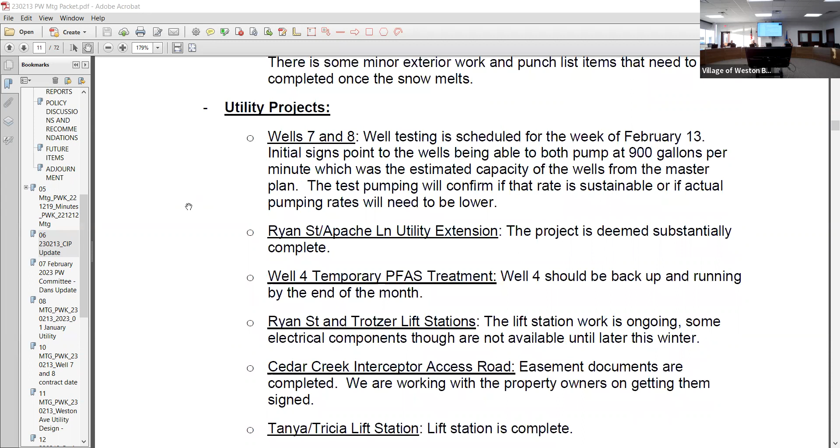And I guess everything else—well, Josh may touch on this—but the well testing is scheduled for this week. The initial signs point to both wells being able to pump at least 900 gallons per minute, which is what we were anticipating, so it's good news.

Initially they were fairly low, so they had to do a couple extra well treatments to get the pumping levels up. Did they blast it? Yeah, they did some shocks and some extra cleanings. Hydrofracture? Yeah, they did a couple different things. They came back with a different process—I can't remember what they call it, some acronym—but it gave them results. I think they were having trouble getting up over 700 for quite a while, so whatever they did seemed to work.

Is it hydrofracture or is it blasting? That's something we can do, sure. I guess that's really it, kind of in the winter lull a little bit here. The Crestwood Acres special assessment letters did go out last month.

That's for the stretch of Weston Avenue between Alderson and Birch. You had a comment in there—Mr. Peterson wants to go back and review it? There was a question by Rothschild about whether they wanted to have a roundabout still at the intersection of Alderson and Weston Avenue. That was what was in the original design proposal, and that's currently how it is being designed.

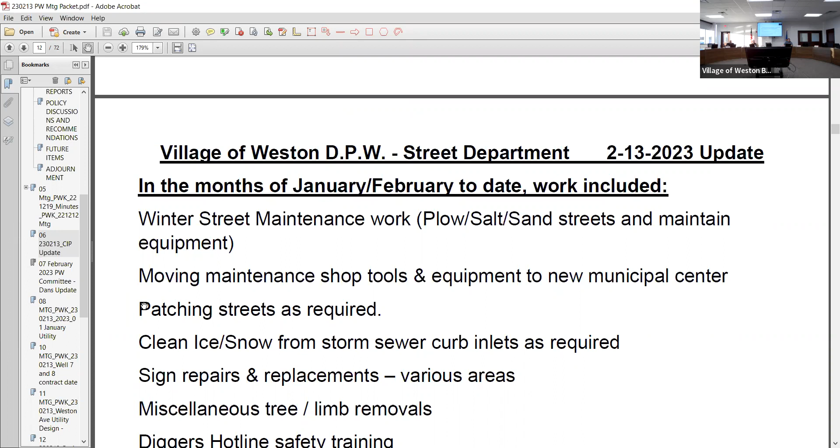Other than that, it's been snow removal. We're pretty much done with that. We got a few streets to finish and there's some cul-de-sacs that we want to clean out yet too, because even though it's only February 13th, we could get blasted with some snow yet between now and April.

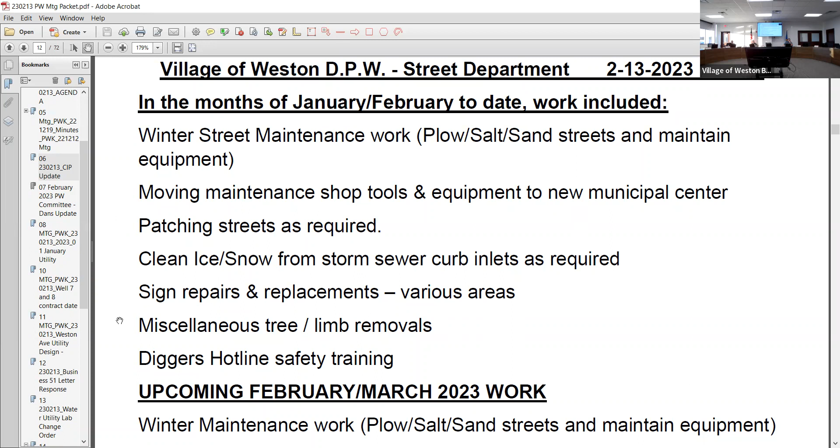So we're going to do what we can on that. Miscellaneous tree removal and stuff, patching. The big thing is moving from the old shop to the new shop. It's a process, there was a lot of items to move. There's a lot of stuff that needs to be put away yet and organized, and it's just gonna take some time, because you can't just stop what we're doing on the street and devote everything to that. So we're trying to work around it all, make it all happen, so it's gonna take a little time, but just keep on with what we're doing.

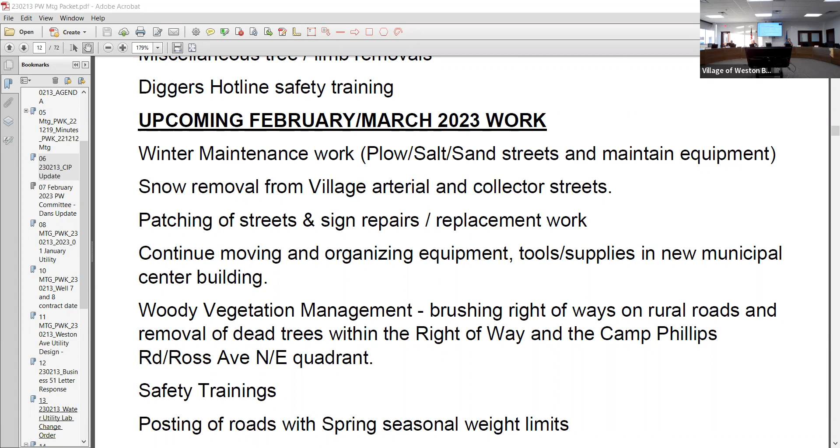We got to use the new building. I took some pictures in the meeting room next door. Diggers Hotline doesn't do the big meetings anymore at Weston Lane, so we had a meeting here. I talked to Diggers Hotline, they come in and we invited Rothschild, Schofield, Kronenwetter, brought people, and it was about an hour-long presentation, which was good. Hopefully as we come into spring, there's some other safety trainings we want to try and do.

I was talking to Dave about some chainsaw safety we want to do again too, probably getting into March sometime, middle to end of March, get that done. So just kind of keep on with what we're doing now, see what Mother Nature throws at us.

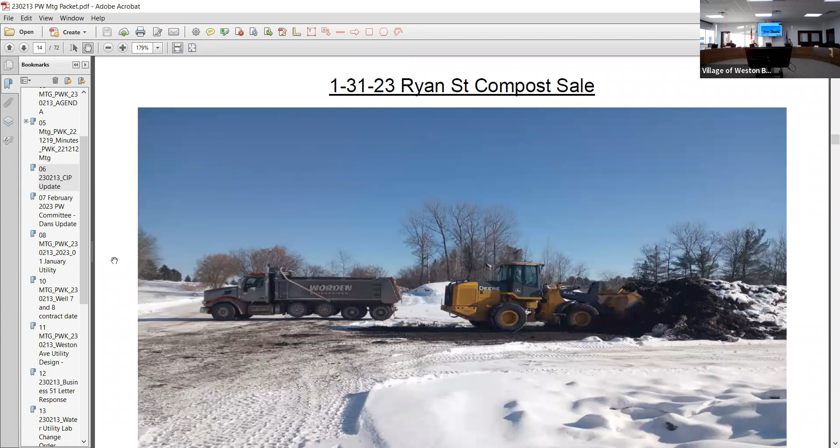There's one thing too, there's a picture there with a compost sale. Randy Worden gave us a price on compost, so there's 3 big rows out there that we're going to sell to him. That's probably over 1,000 yards of compost, which is kind of a good thing, and will free up some space out on Ryan Street for us.

Myself, I've been working on getting all the road maintenance contracts together. We want to have a bid opening on April 5th of this year for crack sealing, chip sealing, all that stuff. Also we're going to look at the contract for Stone Ridge Drive. That's going to be a rehabilitation project going from Weston Avenue north past Sherrill Tire, Westview Boulevard, and it's going to wrap around, go to the west, and end at Ministry.

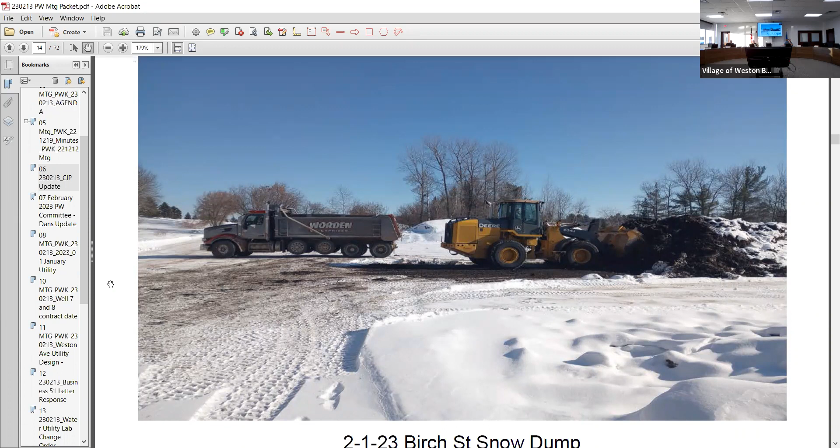There's a lot of bad curb in there, a lot of bad joints on the curb. There's 11-foot long pieces of curb and the joint is rotted that wide. So you hate to rip it all out. It's expensive to do the joint repair, but it's cheaper than ripping it all out and having to do all the restoration. So that's got to get put together yet too.

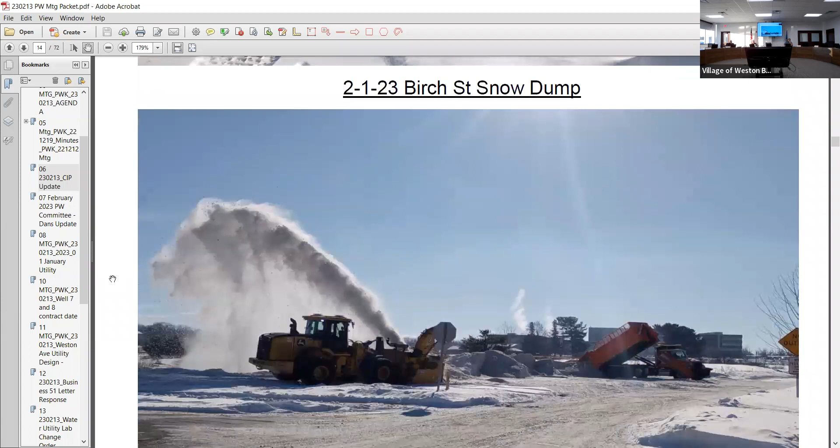And then the asphalt will all be milled off and we'll adjust the water valves and manholes, new asphalt, and the restoration work. So, how much item you have for auction? How many pieces? There was some place you said you have some items you have to auction.

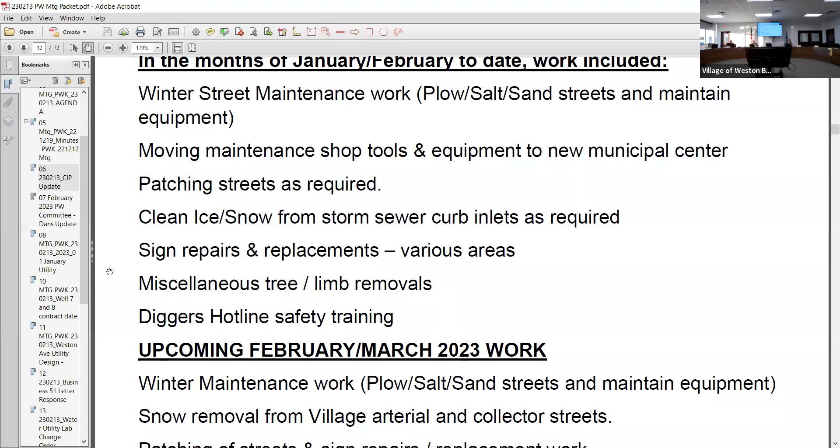You're not using it anymore? We are. There's stuff that's probably going to end up on the Wisconsin surplus online auction yet. Brian Schmidt, our mechanic, is the one that basically has the list of items. There's some stuff, there's an old tire changer there, and there's some other things that'll probably go up on Wisconsin surplus.

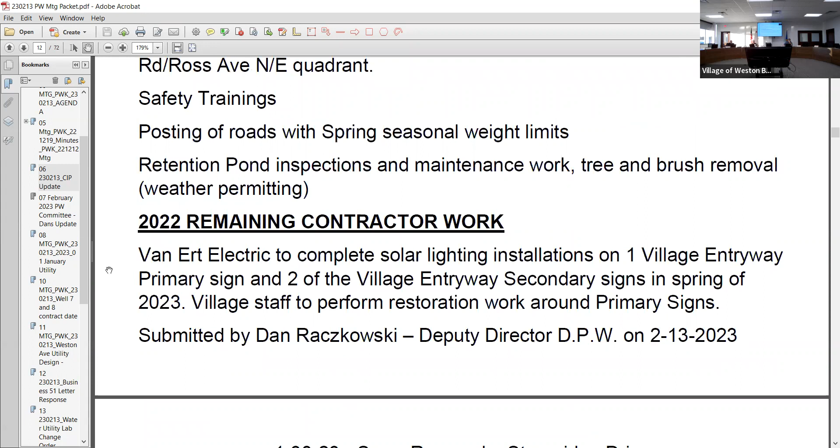I don't know if you got any more insight on it, Michael, than I do, but. No, we figured once we moved over everything that we deem as essential, whatever's left, we'll inventory and, as this committee generally approves it as being declared surplus before we put it on the auction site, so.

And then you'll see there it says remaining contractor work. I actually ran into Doug Milky up at Menards a week ago on Saturday and talked with him. He's researching, we want to put solar lights on the primary signs. I might have talked about this last month's meeting too. So he's working on that to get something that's going to be decent solar lights, that won't have to worry about power on any of them, so.

Okay. Any questions? Anything else you want to say? Pardon? Anything else you have to say? No, I've taken up enough of your time.

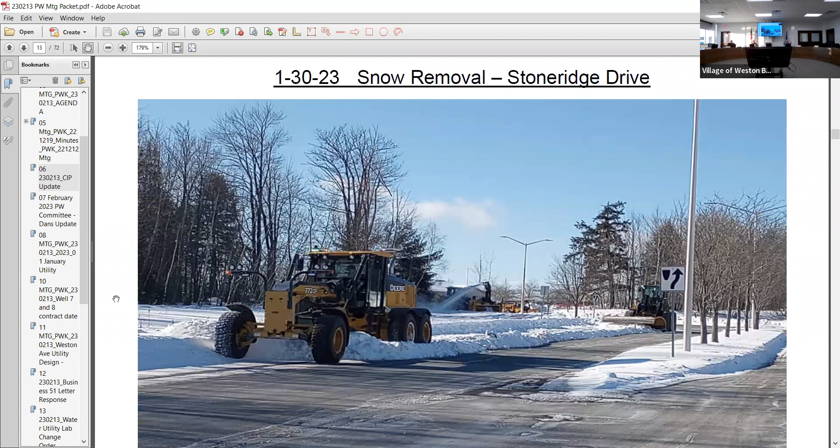Go back up, you didn't talk about the punch list. Oh, for this building? Yeah. It's like 95% done, I think is what they said.

As far as interior goes, and then exterior, they still have to stain or seal the masonry on the outside. There's some sidewalk and other curbing that is going to get redone because it was hit with the roller when they put the asphalt pavement down.

Yeah, I guess I don't have the detail there, but the exterior items will be addressed once the snow melts and it's able to be done.

I know the stairs will be finished up later this week. The floor finisher was here on Friday getting some of the polished concrete taken care of, but there's still other spots they still have to finish up on. They are here and moving, so that's good.

That's good. I guess one other item, since we talked about the building - Roman and I had been in contact with Greenheck Fan, just down the road here, about getting some big fans for the shops to help push the heat from the radiant heaters down to the floor. They'll be gifting us 4 really large fans free of charge, as long as we let them use our space as a case study for how effective the fans are.

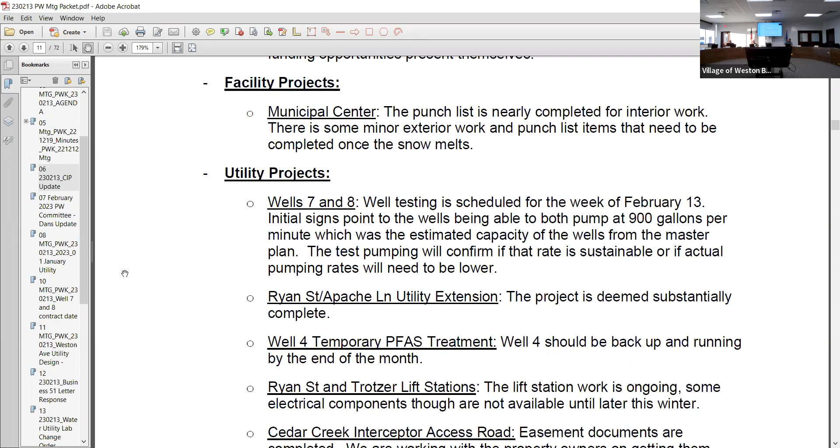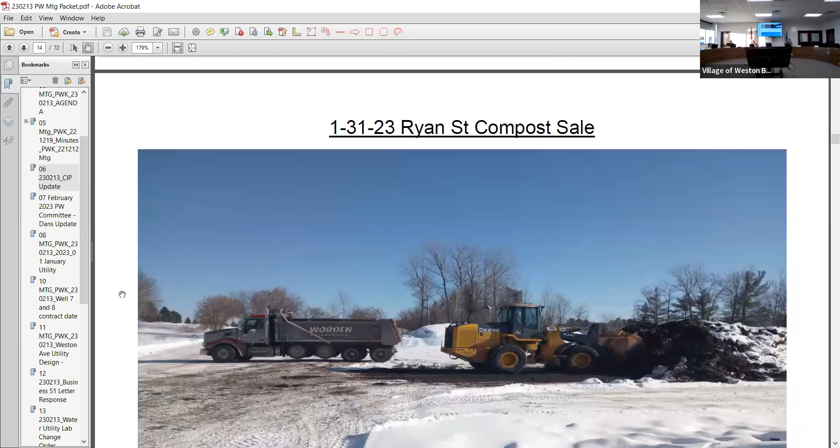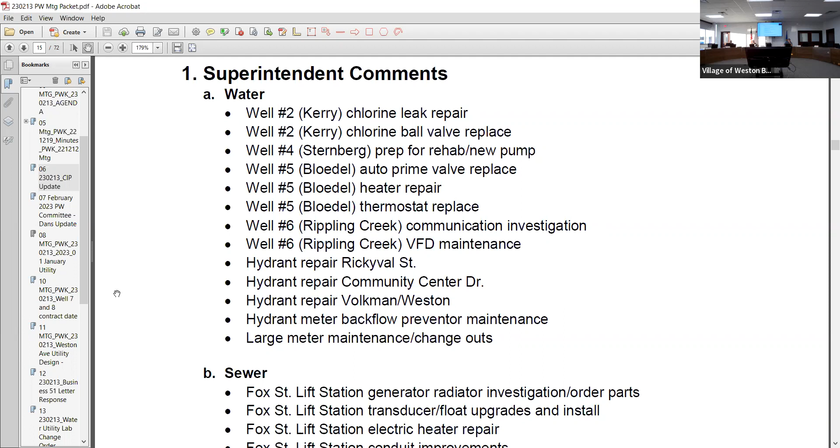Josh? All right, guys were able to get some numerous well interior items taken care of over the last month. Had a few hydrant repairs got taken care of as well. Started our yearly cycle of large meter testing and changeouts. Had a number of lift station items that we took care of as well, that we've been meaning to get to. We did have our Tanya/Trisha lift station generator startup.

We did have discussions with Wausau Tile. Rib Mountain Metro has been experiencing some high pH numbers, met with Wausau Tile. We should be getting our own pH sampling devices here soon, just so we can stay on top of some of these things, so there's no big issues coming down the road with Rib Mountain Metro. Was it the numbers dumping some stuff they weren't supposed to, or?

It seems that way, yeah. Wouldn't be the first time, that's why I brought it up.

They have a new person in place over there who's been pretty good to work with and staying on top of it. They have their sampling device at their last manhole, implementing it soon, and they're going to try to share their information with us. So we're hoping to put some of our own sampling locations upstream of that, then move them throughout the village, because we have some other potential issues coming out of our business park. With some of the numbers Rib Mountain Metro was seeing, we assumed it would have been Wausau Tile, just because they're so close.

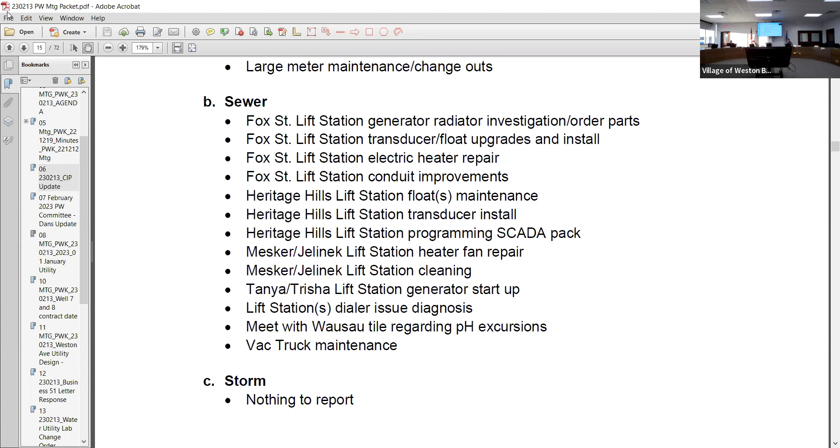We're pretty close. I can't remember if Angel said there's a couple things yet to do, and then we should have an RFP ready to go to submit to get some numbers on our brand new SCADA system, hopefully getting in this year. We have some other items, some bigger ticket ones. We're pretty low for this month, probably due to the weather. Work orders are fairly low at this point.

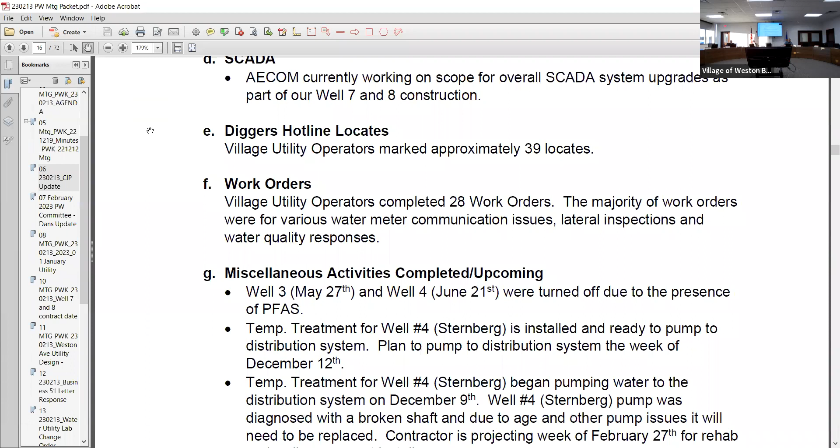A little note on our PFAS: we had some positive news with our well 4 temporary treatment. We got our results back, and our PFAS levels were significant prior to the temporary treatment, but after they were non-detect, so it was functioning as we had hoped it would.

And it was, not a lot, but it was contributing 400 plus gallons a minute to the system of PFAS-free water, so we want to get that back online as quick as possible.

Couple other notes on Kerry Well - we are currently in an ongoing maintenance program for that well. The Kerry facility has been noticing some manganese issues, which we've known could be possible, so we're working with Water Quality Investigations.

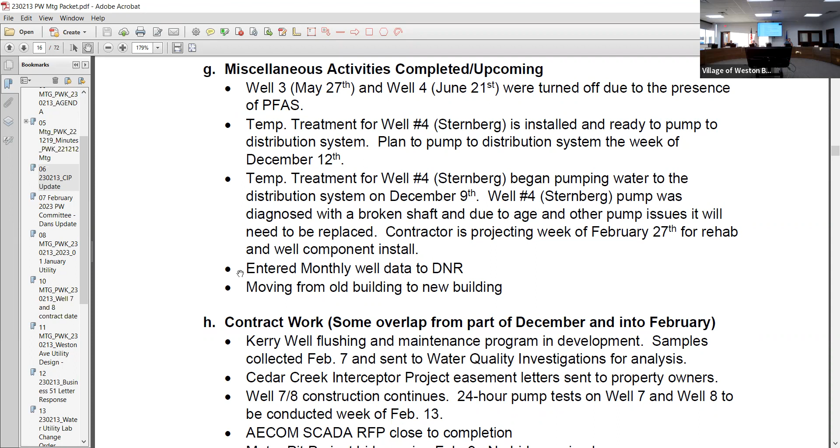Michael touched on well 7 and 8. We are doing the 24-hour tests this week, and AECOM will have a sampler there tomorrow. We'll be observing it to collect our water samples, which will include PFAS analysis, so we can see where we need to go for any future treatment.

We did have a meter pit project bid opening last week where we received no bids. This was to have the 3 meters at our mobile home parks brought up to the surface so they're not in confined space sitting in damp, wet conditions all the time. So we had no bids.

The engineer did reach out to a couple of parties that took out plans to see why they didn't submit, so we're getting some additional information. We'll probably be putting that out again for bid soon.

I think the rest of them have been touched on. Other than that, we just have some of the data for our customers added - our water pumped for the last handful of months, our wastewater flows and lift station hours.

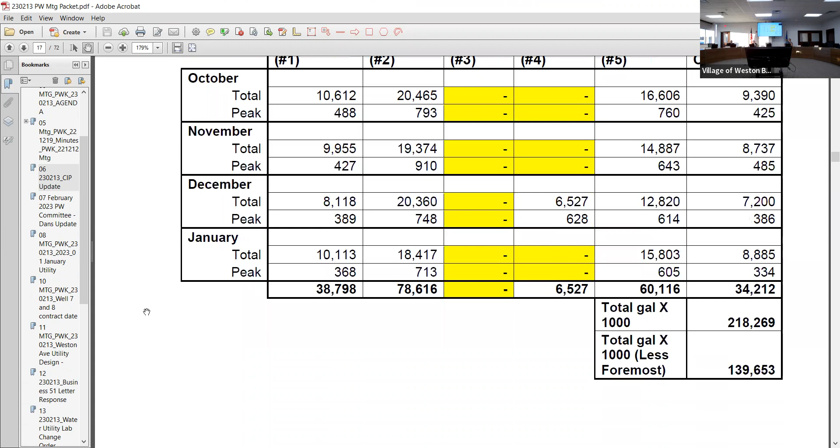Other questions - so is the SCADA system completed and working? No, they're still working on the design, and then it should be bid out this spring for a completely new system.

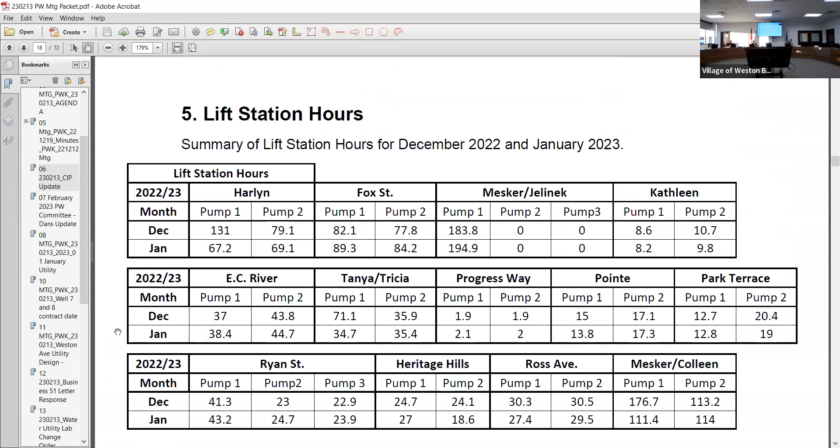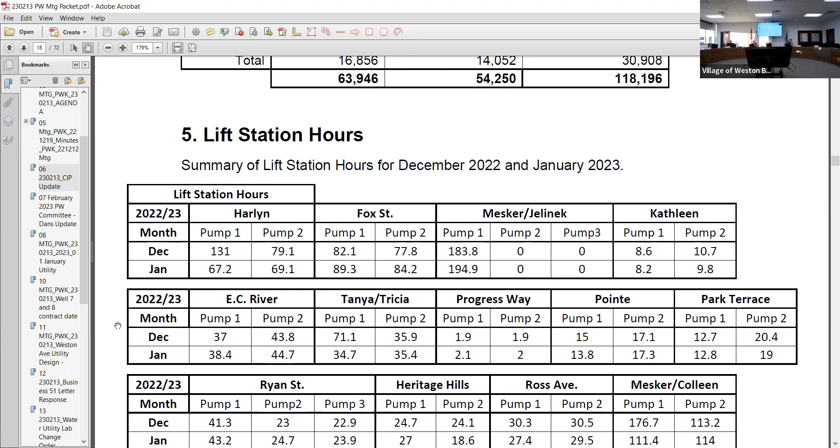So the system we're running had a revamp about 10 years ago, but it was essentially still utilizing a lot of existing equipment. At this point, a lot of the electrical and components all need to be replaced, not just the programming.

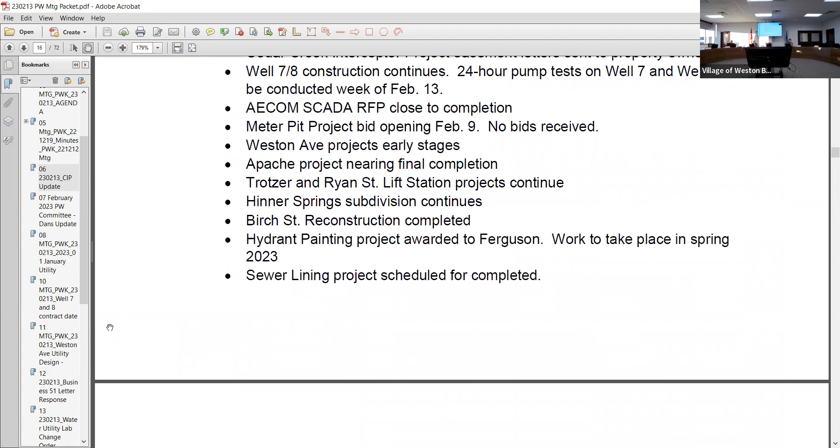It'll be much more intense - they did an intense survey of all our locations to see what's all needed. So it's a pretty big RFP that's going to be going out.

And then your sewer lining on Camp Phillips, pretty good? Yeah, it went well. They finished on time, though they were there for a long time, took off, and came back - they got hit with some unfavorable conditions.

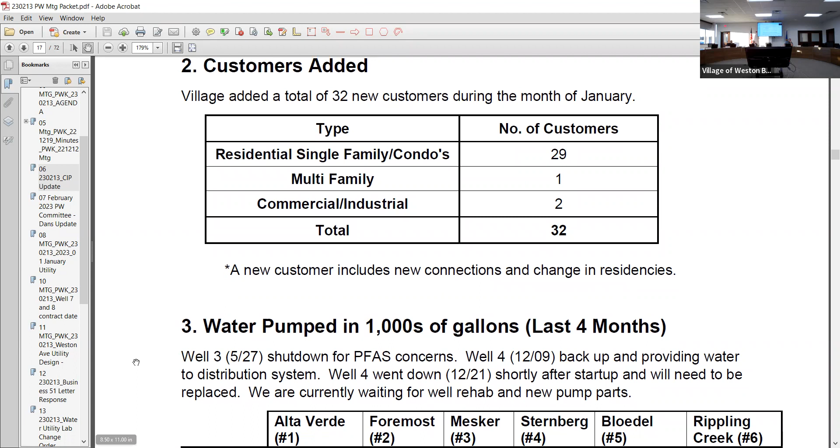When you get some late October, November work, you run the chance of getting a big snow pile on you, and they did. They had some hiccups with their own jetting truck that we lent a hand with a couple times, but they stayed on schedule and finished when they said they would.

It's tough where they have to reset up their huge bypass pumping systems just to bypass a chunk so they can line that chunk, then move down to the next one so they can bypass that chunk so they can line that chunk. It was a tedious process, but they did it.

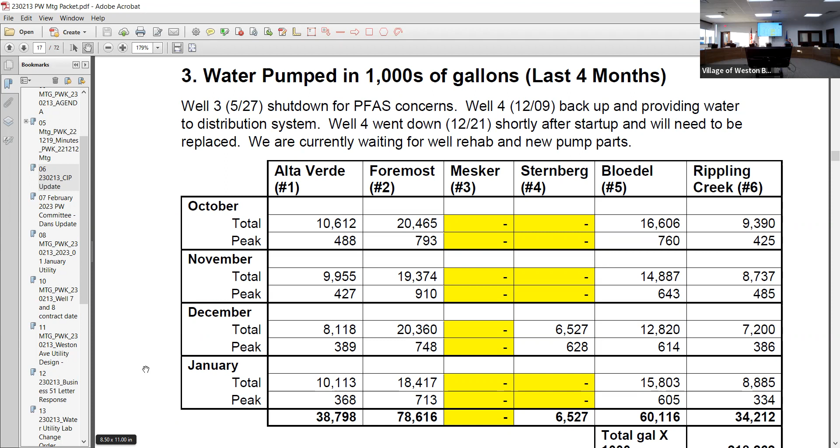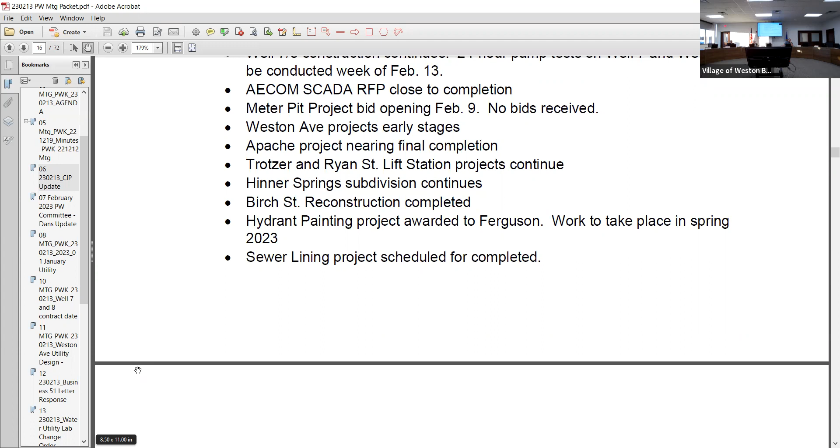And it was a little trickier once they got onto shore, since there were a few more residents on that stretch too. It was a little bit of a wonky setup, probably not perfect, where they had their bypass piping set up.

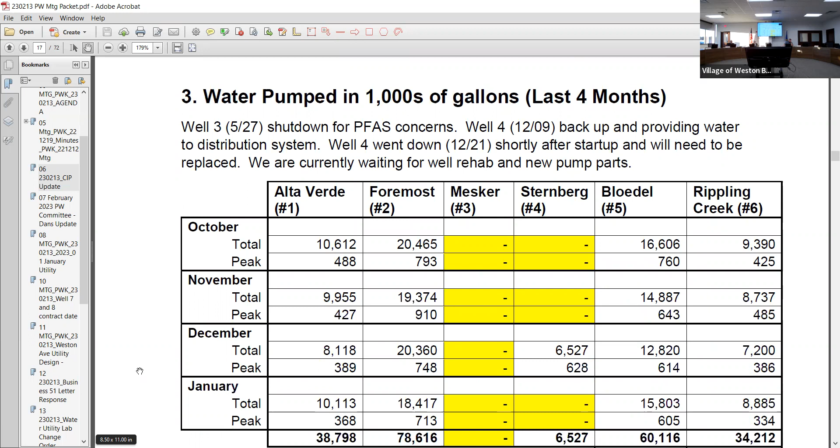But it saved them an extra probably 400 or 500 feet of bypass piping, so they could run it over Birch Street and across Shorey, which I know some residents were displeased about. But it was a few days of headache - the pump never failed, as far as I know.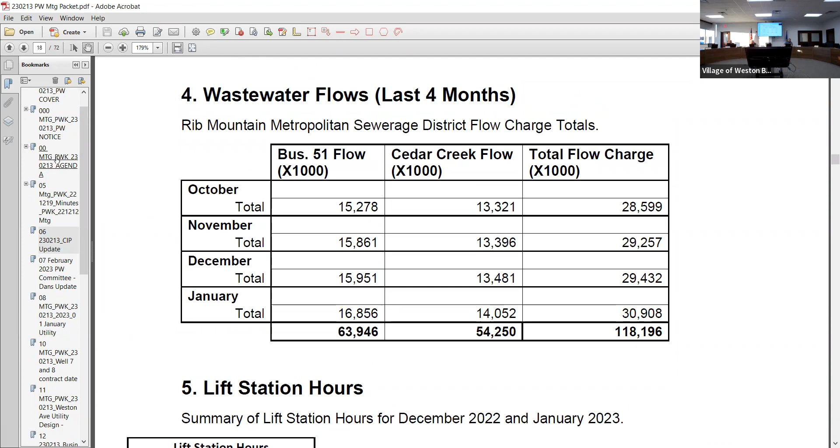No, that's good - nobody called us at least with any backups. They did have to run it continuously, so they did have some people staying on site overnight monitoring it. All right, question for Josh?

Policy discussion and recommendation, item 9, water meter pit pad.

So, we had a bid opening last week and we received zero bids. Why? Nobody wants to work there, or what?

It sounded like part of it was that it's a unique project, not large enough to keep a crew on for the whole summer. It'd be kind of a tedious little fill-in job. It sounded like one of the contractors just ran out of time to get their bid in.

I think one of them had questions about some potential dewatering and just ran out of time. How deep is that pit? They're not deep, probably 8 feet. Did they do the boring? No.

All it would be is taking the existing meter pit that's 8 feet deep and running it up to the surface into heated enclosures, so our guys can get to it and change them out, since they have to be changed out and tested every 2 years. We wanted to avoid any confined space conditions, so we wanted them brought to the surface in heated enclosures.

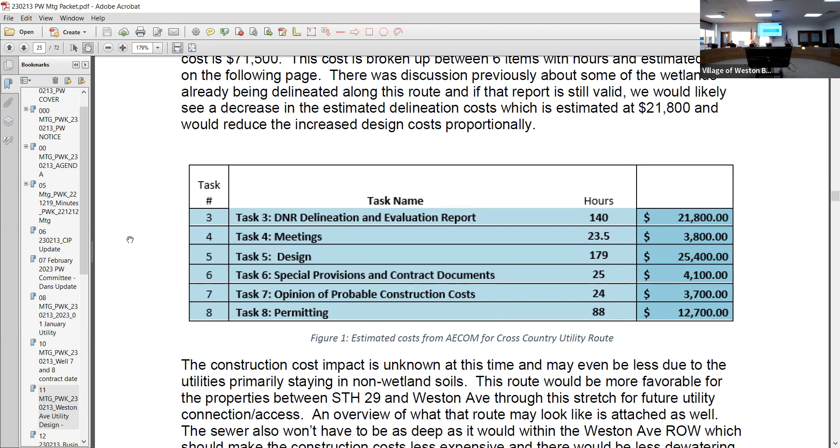So some of these costs relate to the delineation. This actual task 7, the opinion of probable construction cost, that's not actually in the final change order as it's presented. That number falls under the final design, which is the 25,400. So that number didn't change from the original. So it's this, or 25.4.

The delineation and evaluation report, we were provided from actually one of the property owners, a wetland delineation that was done in late 2021 and was approved by the DNR in '22. And if that delineation should still be accepted by the DNR, that number actually should end up being probably more like $6,000 instead of $21,000, or almost $22,000. So we should see a fairly significant decrease there.

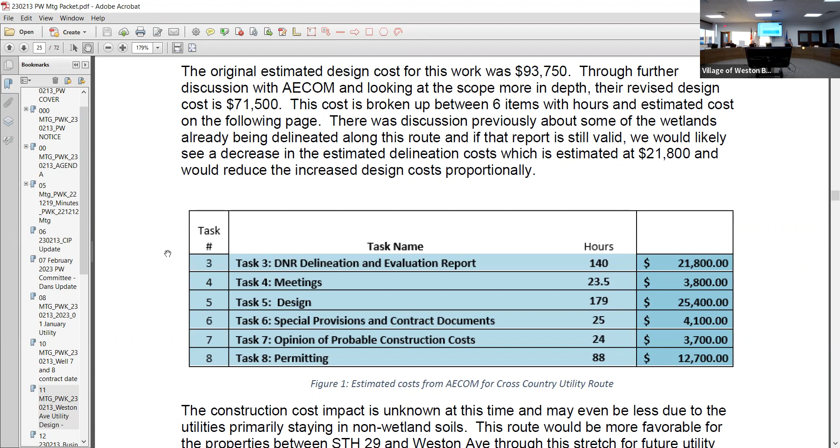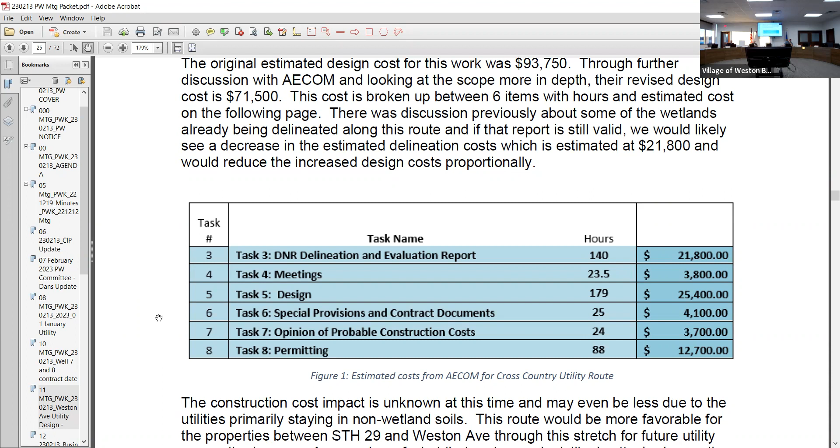AECOM is leaving that cost in there in case it's necessary, but they don't think it's going to be necessary. And similarly with any extra bidding costs, the project would be bid more than likely with another phase of the Weston Avenue project. But in case for some reason we need to bid this project separately, that would stay in there as an option. So I guess in summary, it's really a not-to-exceed budget, time and materials of what they actually spend.

So it's not like we're approving a set number that's going to be paid no matter what. It's a limit of what could be spent. If that makes sense.

Maybe for board approval, you should give them a range to say this number could be from this to something. And if it's significant enough, the initial $71.5 thousand that was approved might cover it anyways.

So I think it should, because even his design is high. Because as I said, we talked about it. Yeah, we got only 0.4 or 0.5 miles of sewer, 0.3 miles of water. The water doesn't take much time to build because there's no slope in there. Sewer, yes, there's a little bit more challenging, but again, I think he's high in there too, so. Sure. Okay.

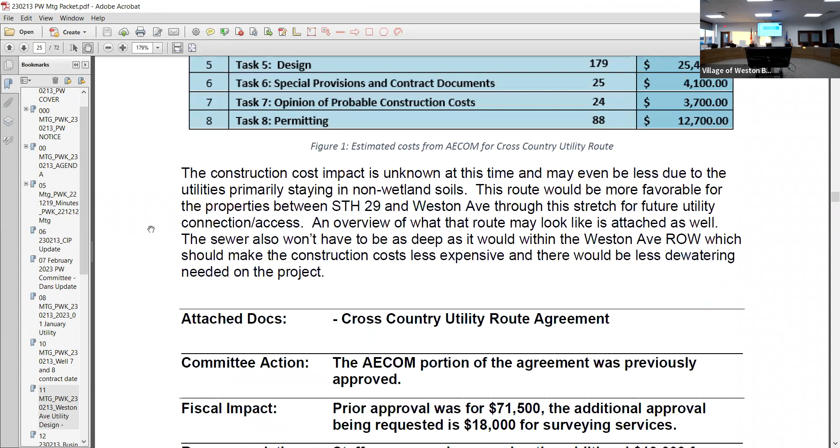I'll move to recommend the village board approve the additional surveying costs for a cross-country utility route east of Progress Way for an additional $18,000, for a total not to exceed cost of $89,500.

Is there a second? I'll second. Discussion? All in favor signify by saying aye. Aye. Opposed? Motion carries, thank you.

Item 12, Business 51 construction detour cost share, and the draft municipal maintenance agreement. Michael? I wasn't quite sure how to word this on the agenda.

As part of the Business 51 reconstruction project with DOT, we've had a couple of meetings with representatives of the DOT reviewing the 30% design. As part of that, we had a meeting and DOT sent us a letter requesting that our communities take official action on first approving the use of local roads during construction for detour routes, if there was a desire or need for storm sewer upsizing cost shares, and then also official comment on the draft state municipal maintenance agreement.

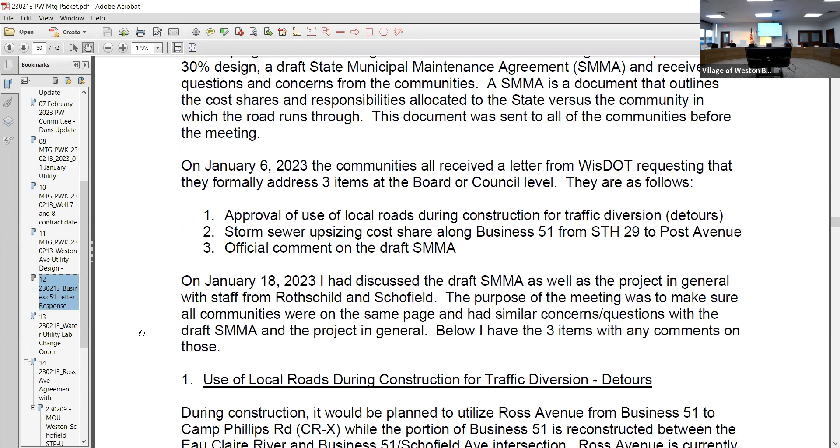I discussed this briefly at one of the last meetings, but we met in January with Rothschild and Schofield at the staff level going over some of these things. So I'll just step through one at a time.

For the local roads, this project for Business 51 is slated in that 2026 to 2027 timeframe. As I mentioned earlier, Ross Ave is programmed for reconstruction in 2027. So we need to make sure that's coordinated appropriately, but if it's used as a detour in 2026 and we reconstruct it in 2027, I don't foresee that being an issue, since they'll beat up a road that's going to get reconstructed the following year. So I'd be fine with letting them use that.

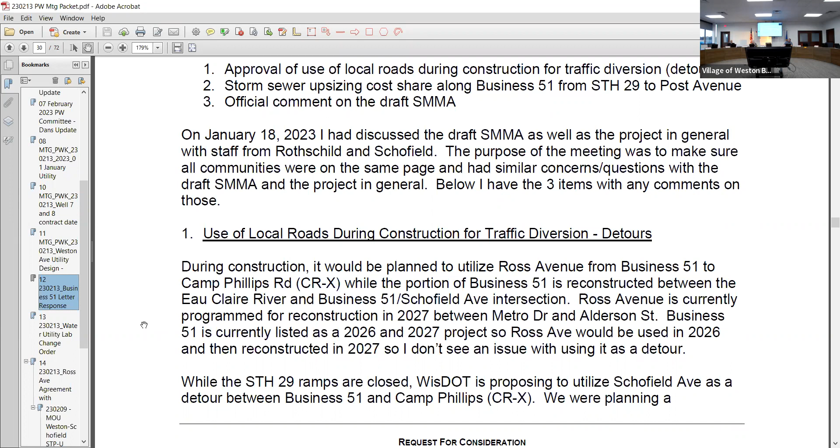The only other road they were looking at utilizing primarily would be Schofield Avenue. We've talked about the reconstruction of Schofield Avenue somewhere in that 2025 to 2026 timeframe, so I don't know if this changes things. We do have the TIF district funding window we're trying to stay within. Whether it's a brand new road, I don't know how many people would use the signed Schofield Ave detour — there are other ways around that area too.

Primarily people that have to get off at J would probably take Schofield Avenue to get over to Highway 29, or they just stay on Highway 29 until they get over to, I guess they could take it south to the Cedar Creek area and then get back.

So they're still staging that for 2027 construction? Yeah, they're looking at staging it — part in 2026 and part in 2027. Because the road is already like before — if you drive it today, you'll see the bumps there. What they had before is exactly there. That's where they're at right now.

I complained to Senator Tomczyk about it. I said they delayed the project because they want to buy right-of-way. He said, how much right-of-way is there anyway? I know that road, and he's right, he knows the road because he drives on it. He said he's going to take a look at it and see why.

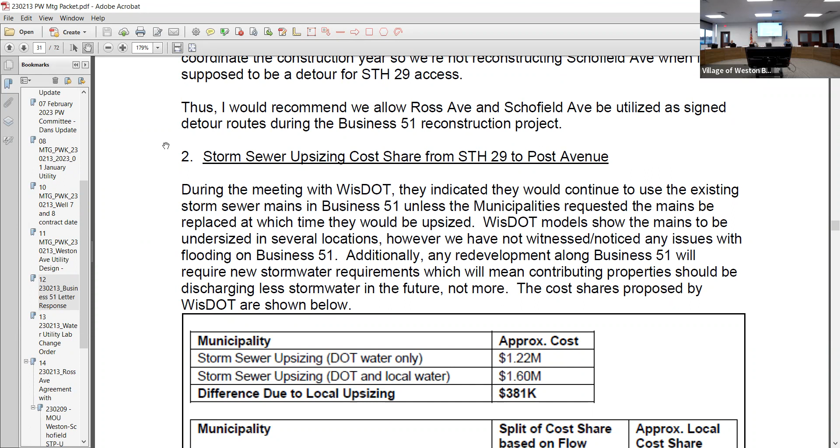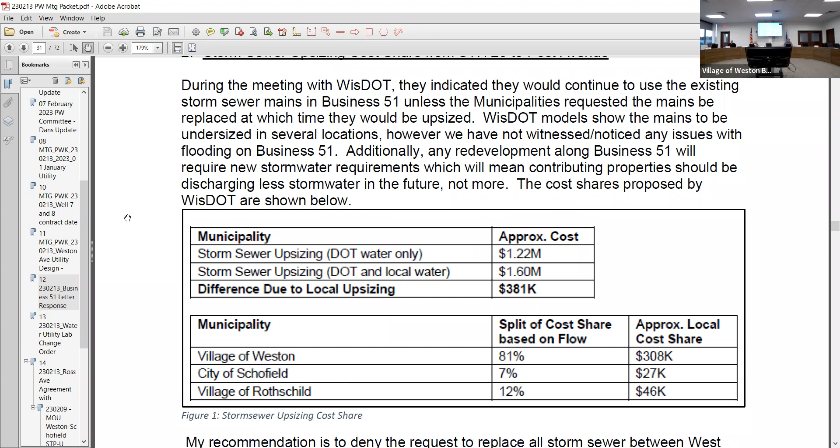So they can't just release all of it immediately anyway — they have to have some kind of on-site detention. So if anything, the water going to that storm sewer system should be less moving forward, not more. So we don't think there needs to be any upsizing. Our cost of that would have been $308,000. We can forego paying for the DOT to upsize anything because it's not necessary. They'll replace any main that needs to be replaced, but not increase the size of the pipe. How much was he increasing it?

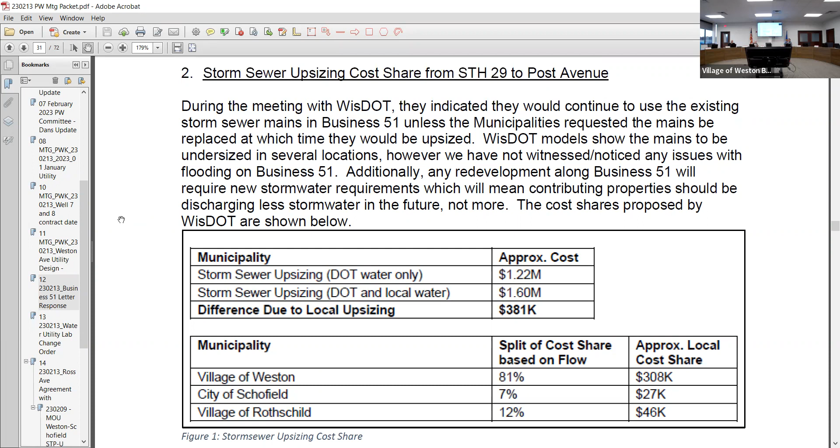I forget, I think some of it was going 18-inch up to 24-inch, some 15s up to 18. Kind of essentially one size larger going up the street.

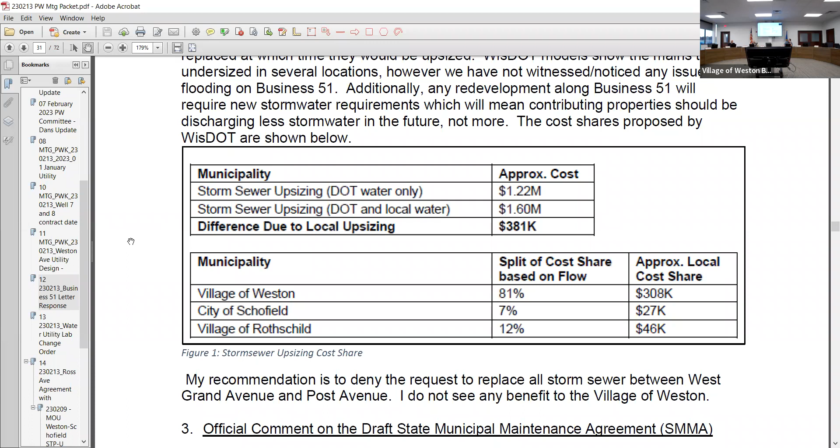So I guess all of our communities, Rothschild, Schofield, we don't see a need for that upsizing. So who's the engineer designing it? For the state, EMCS is their design consultant.

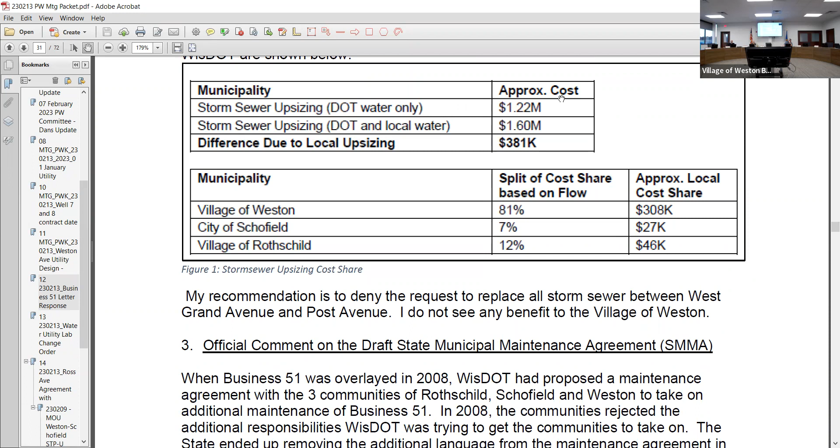So we'll come back to this one, just note that the storm sewer upsizing, the DOT seemed to be committing $1.2 million towards that. So I'll come back later here.

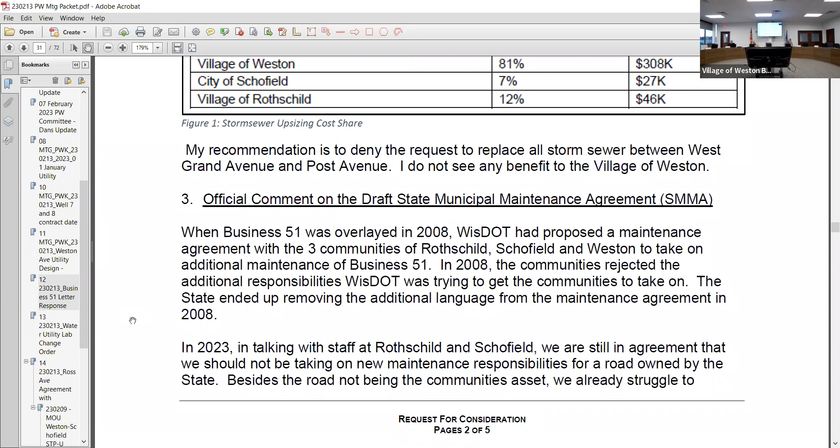And then the draft municipal maintenance agreement. Just before my time here in 2008, the DOT had proposed a maintenance agreement with our three communities. I think when the overlay project was taken on initially, at the time the state had added some language about the municipalities taking on maintenance of the road, which the communities essentially told the state, no, we don't think that's right. So the state took that language out of the maintenance agreement in 2008. And here we are in 2023, and the language of us taking over maintenance of the storm sewer has popped back up.

So we initially told the state, we don't think that's ours to maintain. It's not our road, so we shouldn't have to maintain the storm sewer on that road either for you. We already struggle to get all of our own maintenance done. The city of Schofield brought up the fact that they have a crew of 4 people - not even enough to properly do traffic control and safely do any maintenance on the road themselves, so they'd be contracting out any repairs anyway. So it really should be the state to maintain their own infrastructure, just like we're expected to maintain our own.

Good answer. Yeah, so we struck out - there's a strikeout version of this which pretty much eliminates any and all references to the fact that we would want to maintain the system.

Is there any benefit that they try to throw at us? Like, it's our benefit or your benefit to do this because of X, Y, Z? Not that they have said, no.

Currently they contract or work with the Marathon County Highway Department to maintain their infrastructure. So I guess I don't see why having us run the street sweeper up and down the road, clean their inlets, and fix any broken grates - I don't see why we should be doing that if they already have a mechanism in place for that. The cost of the maintenance is higher than the cost of the construction of the road, so they try to give that maintenance. They say, okay, we build it the way you please, you do the maintenance. So I don't think we should do it.

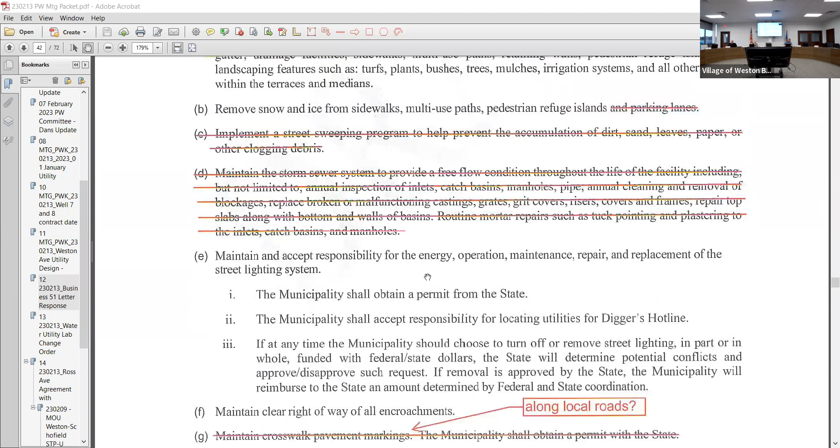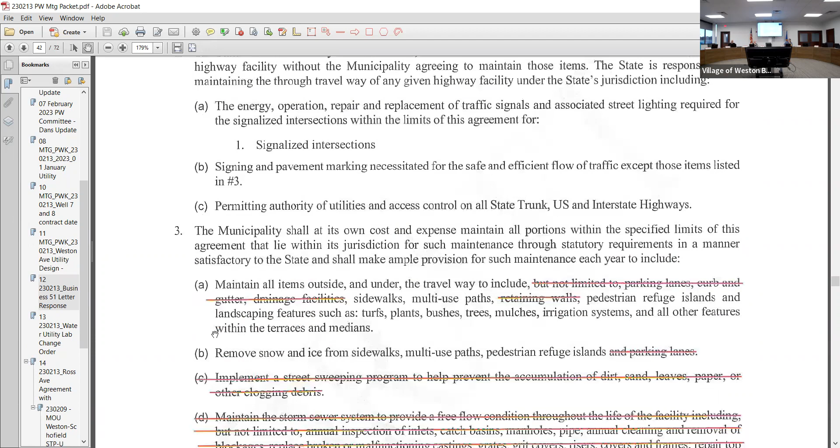But yeah, any reference to the storm sewer system - inlets, catch basins, manholes - we don't see why that should be our responsibility, as we're not getting paid to do it either. Anything else? Yeah, so then there's a fourth item.

Which we brought up as the communities, as part of our stormwater master plans. There's a regional stormwater basin that was identified by Strand Associates for all of us, actually within the Highway 29 / Business 51 on-ramp.

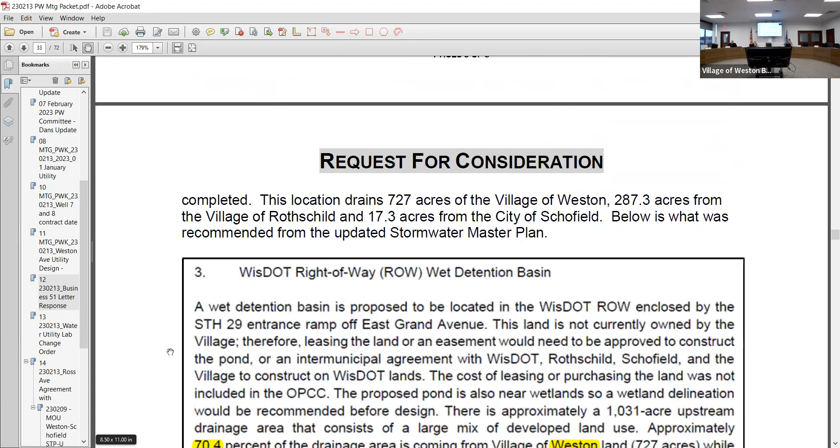At this point, we have a major 60-inch storm line that comes from Hughes Avenue underneath Volkman Street that currently just goes straight to the Wisconsin River in that spot. And the main that comes down Business 51 does have contributions from Rothschild and Schofield in it. So if we were able to put a storm pond in the middle of that on-ramp, it would treat a fair amount of our stormwater.

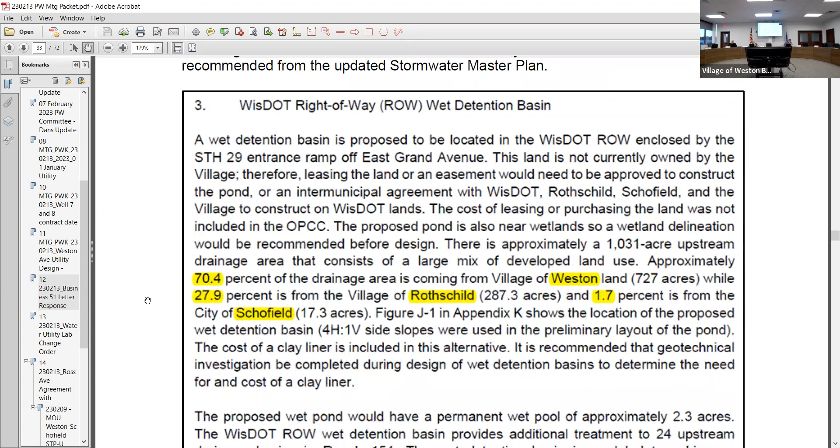For the village of Weston, that location drains 727 acres. And it is the single highest bang for our buck project that was identified in our stormwater management plan to get us into or closer to compliance with the DNR requirements for phosphorus removal.

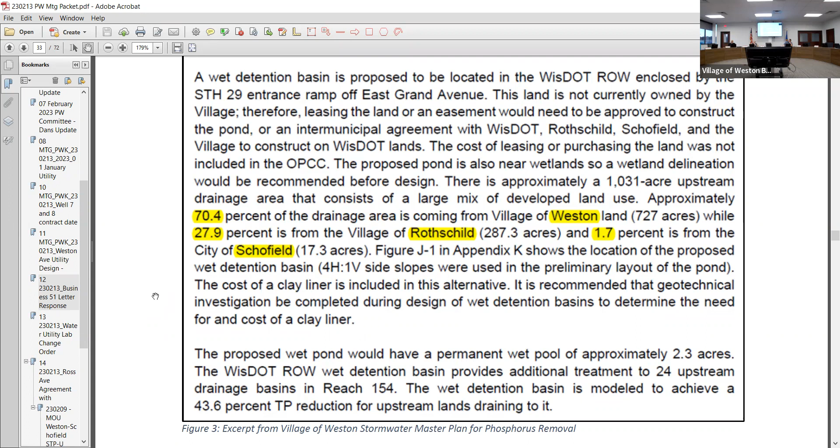So part of my thought process was, since we're telling the DOT we don't want you to upsize the pipe, we would like you to save that 1.2 million and invest it instead in the storm pond to help us have better water quality entering the Wisconsin River. So that'd be my first ask of them, since we're not upsizing, let's put that money somewhere else where it'll be beneficial to everybody.

And I guess also, at the very least, we want to have the right to utilize that property. Because initially they said no, we're not going to let you use that pond or that area for a pond. I'll try to get an aerial here.

So our storm pipe already comes this way from Hughes Avenue and cuts through, enters the river over there. Rothschild has a pipe here. I think some of our water from McIntyre and Jelnik also is there. And then we would intercept the Business 51 line here. So it would be a beneficial project for all three of our communities.

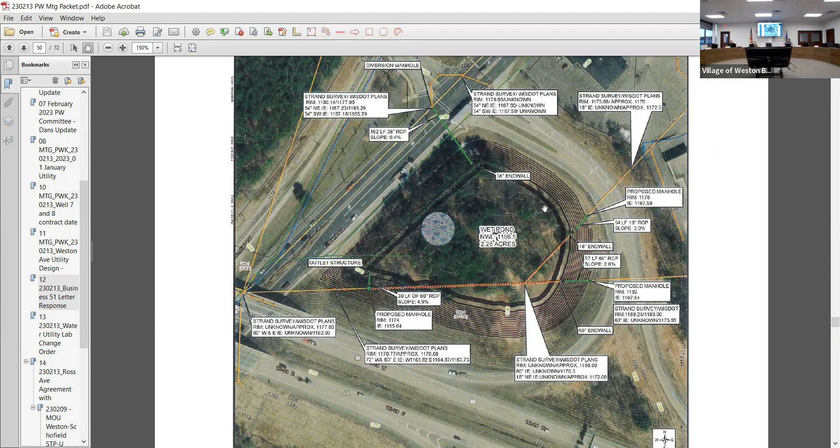Are those percentages you figured out a pretty good number? Those percentages are based on the area treated. That page came straight from our stormwater master plan that was submitted to the DNR, just showing who's responsible for what. So we have 727 acres, so it's 70%. Rothschild's got 28%, and Schofield has a small amount, but they're not that large of a community either.

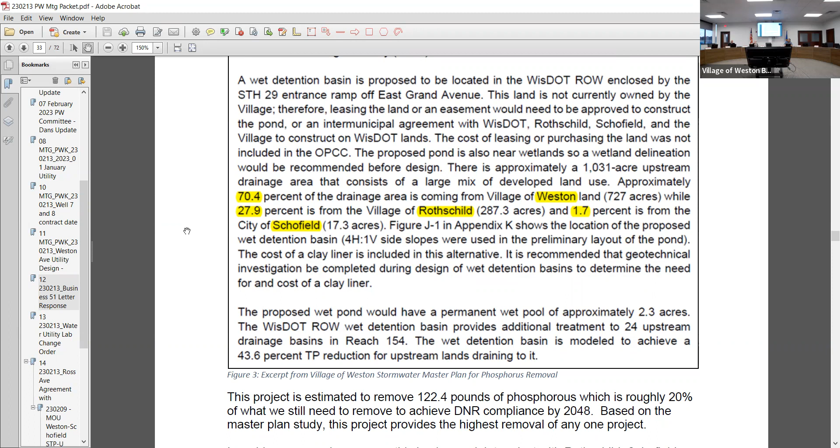Good job, Michael. Thank you. Yep.

What's your wishes? There are 4 items, we have to make a recommendation on that. Could I move to approve as written? Or would you like me to read it all? I think it's fine if you just say item 1, 2, 3, 4. I move to approve the language as written for items 1, 2, 3, and 4 on this item. Is there a second? I'll second. Discussion? If you can just copy it from there and put it in that motion, please. Just the way it's written in there, I think is pretty good. All in favor, signify by saying aye. Aye. Opposed? I have it, thank you.

Item 13, water utility lab build-out.

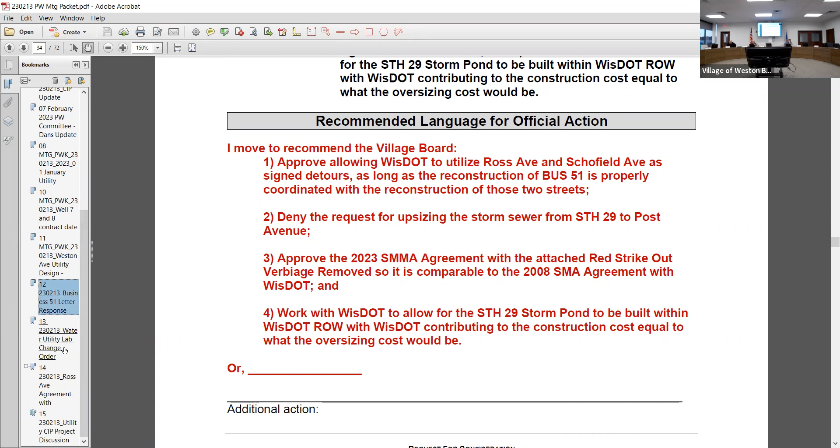Attached is a change order to finish out the water utility lab in this building. It was initially left as a shell, thinking we'd use the treatment plant for that function. However, when PFAS came in, we're now using that space as it was initially designed for granular activated carbon, not PFAS removal specifically. So we'll likely be using that technology for PFAS removal, which created a need for us to get the lab finished out sooner than later.

So you're looking to get that quote, that approval for $34,531.16, and that'll be paid for by the water utility. So it's in this building, but it's not part of the building cost. It's a utility cost for essentially furnishing the testing room.

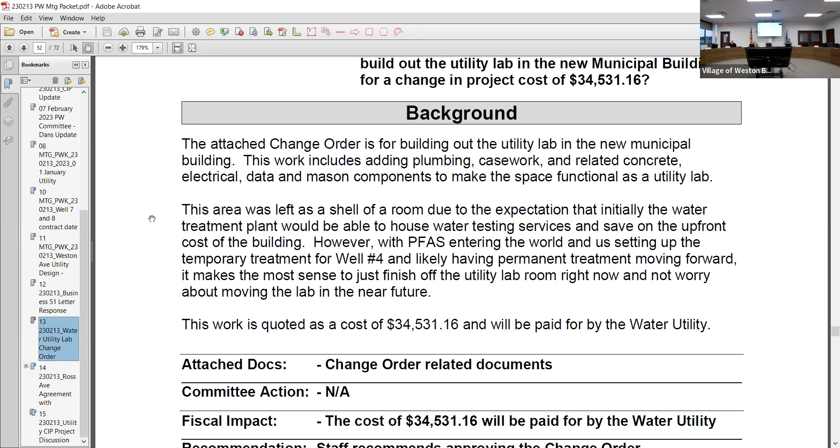Any question on that? I move to recommend the village board approve the water lab change order for a price of $34,531.16 to be paid for by the water utility. I second. Discussion.

Who's the contractor? That'd be Miron, and then they'd be working with the same subs they have on this building. Oh, I saw Miron had some cost for Hooper. What was that? Yeah, so Hooper would be the plumber, Van Ert, I think there's a little bit of data and electrical that needs to just be moved. So we don't need another plumber coming there? No.

Okay, great. So that's the total cost, correct, for the lab, yeah. We're still looking at other quotes for the pipe, for the meter testing. Oh, okay. All right, all in favor, signify by saying aye. Aye. Opposed? I have it, thank you.

Intergovernmental agreement with the city of Schofield for reconstruction of Ross Avenue from Metro Drive to Alderson Street.

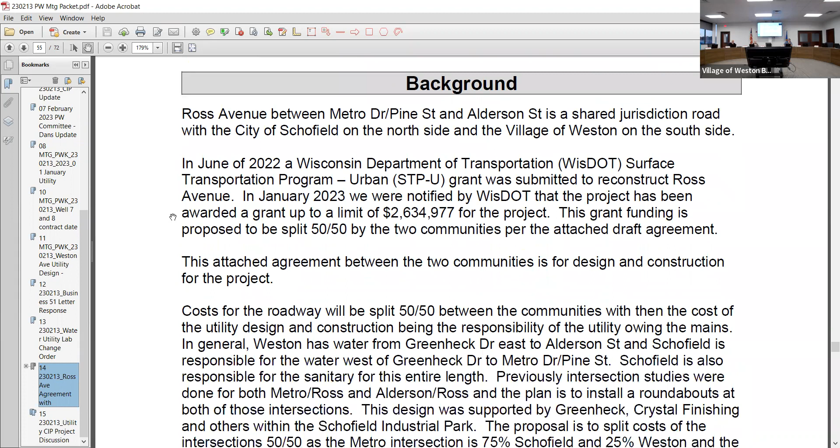As I mentioned earlier, we received a grant. I guess we were notified in January. So it's a little over $2.6 million, which we'll be looking to split with Schofield. As I said, the north half of the road is in the city of Schofield, the south half of the road is in the village of Weston. And even if you look at the intersections, Metro Drive is 3/4 Schofield, 1/4 Weston, but Alderson is 3/4 Weston, 1/4 Schofield, so it's essentially equal.

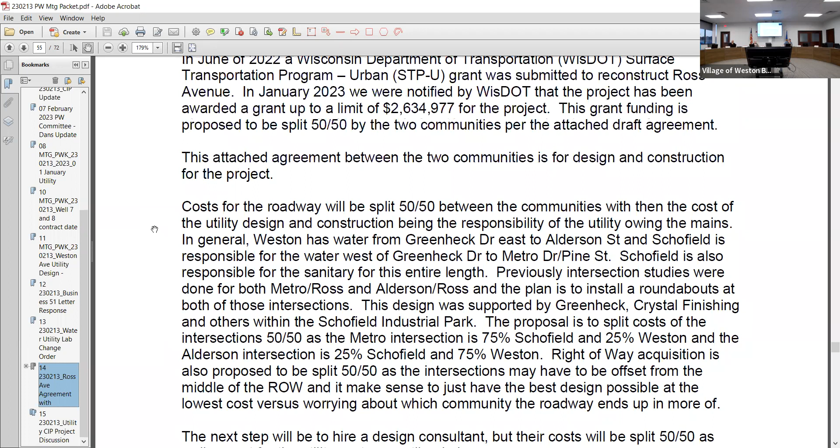What's our cost? Well, our grant share would be...

1.317 million. We don't have a design consultant picked or solicited yet, so we'd fill that in. As we put out the request for proposals for design, we would obtain that price. The agreement just notes that all costs there would be shared 50-50 for design.

The only caveat would be for any utility work. We have water main that currently goes from Alderson Street to Greenheck Drive, and then Greenheck Drive to Metro is Schofield's water main. And then they have the sanitary sewer the whole length. So if they want to do anything with the sanitary sewer or their water main, that would be on them. Similarly, our water main would be our cost.

Otherwise, the street we're just proposing would be shared half and half. So that project's gonna be a roundabout at the intersection of Metro and Ross, and also at Alderson and Ross - that was the initial proposal.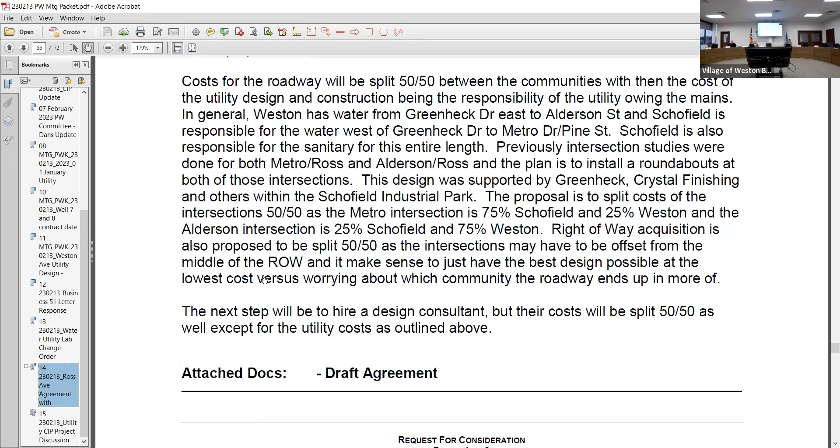And we had letters of support from Crystal Finishing, Greenheck - I had it listed here somewhere, I just don't want to say somebody's name wrong. I know Integrity Grading had a letter of support in there. There's a couple others too, just industrial trucking outfits that use that corridor on a very frequent basis.

The current design doesn't allow some of their trucks. I know Merrill Iron and Steel, just Merrill Steel now - every now and then they ask for a special exemption and just go straight on Alderson Street because they'll have longer beams and they can't make that corner to get out to Business 51.

Question? All right, what's your wishes? We agree with that 50-50 cost?

I move to recommend the village board approve the agreement with the city of Schofield for design and construction of Ross Avenue from Metro Drive/Pine Street to Alderson Street. Second. All in favor signify by saying aye. Aye. Opposed? Thank you.

Future water and sewer utility capital project.

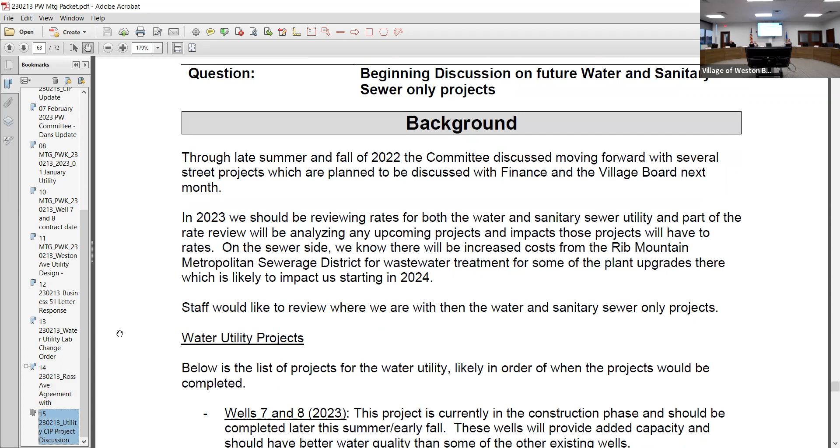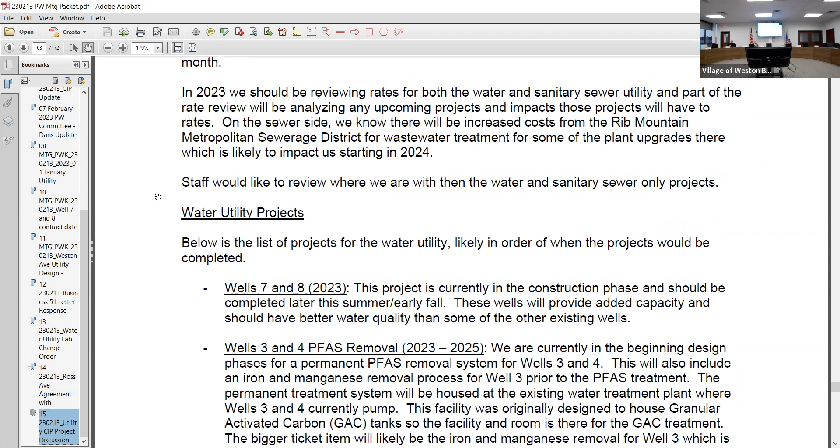Late last fall, we went over some of the street projects, which we'll be discussing with finance and the board in March here. Just wanted to, for my own sake, remember where we're at with the rest of our queue of projects.

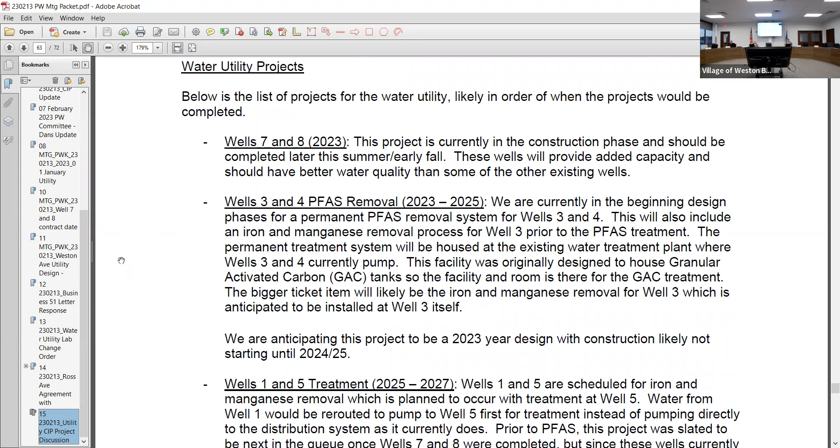So wells 7 and 8 should be done and completed this year, which means our next well projects are wells 3 and 4 for PFAS removal. We are in the beginning design phase with AECOM designing that removal system for wells 3 and 4, which includes the need for an iron and manganese removal for well 3 prior to any PFAS treatment.

The granular activated carbon would be housed in the existing water treatment plant, and then we'd likely need to put in an iron and manganese removal plant at well 3 itself - somewhere in that Mesker well house, or adding on to the well house, probably towards the public safety building a little bit.

So we'd anticipate that to continue design through 2023 and then construction probably in 24, 25. Josh had a couple of meetings sitting in with the DNR and AECOM regarding some of the grant and funding opportunities for emerging contaminants, so we'll be looking to take advantage of any and all funding opportunities we have for that project.

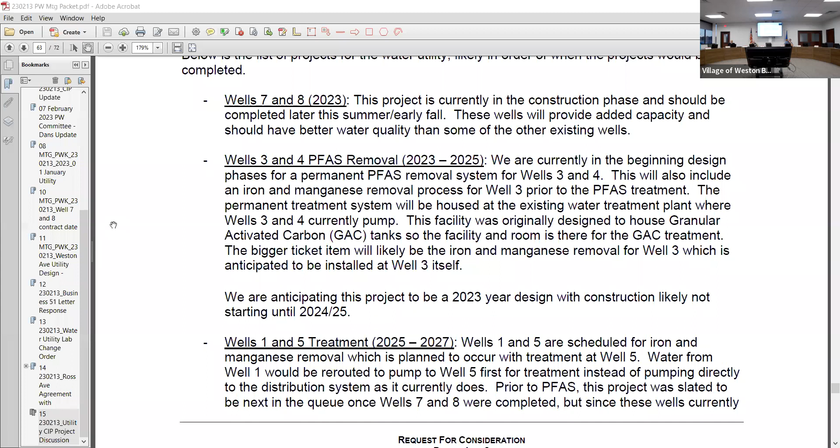Unfortunately, that pushes wells 1 and 5 likely out into 2025, 2027. We initially were looking at having those scheduled for iron and manganese removal, which would route water from well 1 or Kennedy Park over to the Bladel well, and from there they would pump to the distribution system. That project kind of got flipped with wells 3 and 4, just because wells 1 and 5 can currently pump and meet all current health standards for PFAS levels, whereas wells 3 and 4 weren't able to. So that's why those got mixed around.

But hopefully, once wells 7 and 8 come online, we can reduce the amount of pumping that wells 1 and 5 have to the system, so the water quality should improve just by pumping these guys a little less.

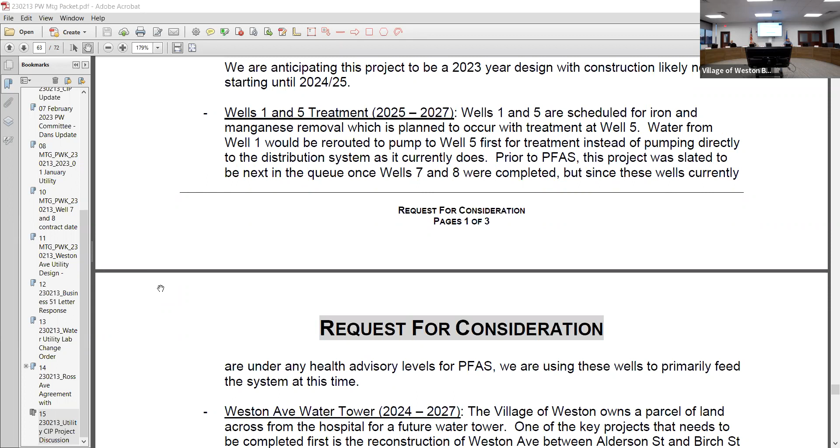Then we have a replacement water tower on Weston Avenue, kind of over by the hospital. So we need the Birch and Weston Ave, Birch to Alderson project to be completed first. So we have the water main looped on Weston Avenue there, and essentially would reroute the Summit Tower, which is currently just northwest of the Weston and Alderson intersection, and would have the new tower placed then over by the hospital.

Then we'd have to decommission the Summit Tower and likely have still a large pole. That's where a lot of our communications for our meter reading is held at the Summit Tower. So we'd see if it's still possible to try to move that, or if we would need to keep a kind of a monopole there just for the communications aspect of it.

And then the Business 51 water main replacement, that's just taking advantage of the state ripping up the road. We can then replace our existing water main in there. We have several spots where there's dual mains. I'm not sure if that was done just because the road was in the middle and these people needed service, so the water main got put in on the east side of the road, and then these people needed water, so a water main got put in on the west side of the road just so you didn't have to dig up the road. So we'll be getting rid of some of that dual main and just having one main in there.

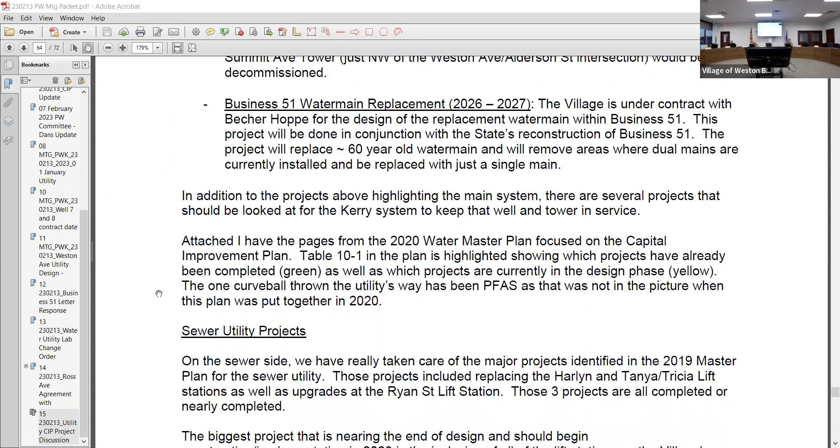So as Josh alluded to, the Kerry system, there's a few things we're looking at there yet, either replacing the tower or having a surge tank put in. So they're kind of their own little animal on that side.

And I attached the capital improvement plan here. I try to update it and look at it as we go. So anything in green is a project that we finished.

Like our Ryan Street river crossing, this Everest Avenue was part of the Crestwood Acres project. We ended up putting a 12-inch main on Everest Ave to go from the water tower out to Camp Phillips Road. Previously, that was only a 6-inch line. And then the Birch Street, we closed that gap this past summer.

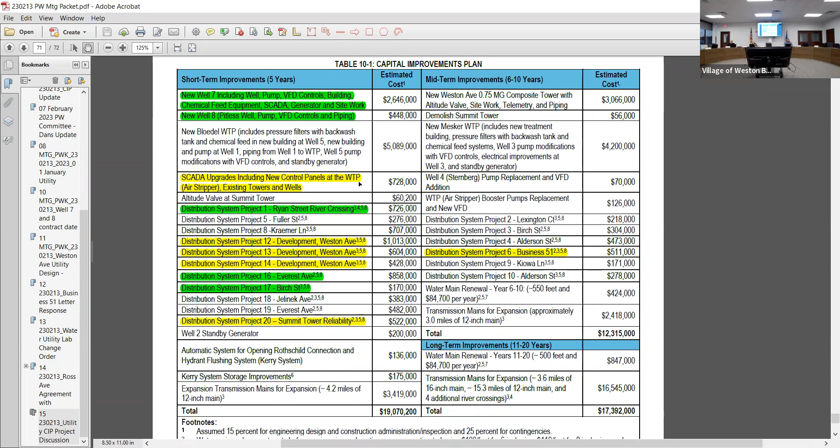So we have been ticking off this list, and anything in yellow is something that's currently under design or in consideration. So these Weston Avenue ones are part of the X to J, projects 12, 13, 14. This project 20 is actually the looping as part of the Weston Ave, Alderson to Birch project. And then our Business 51 project is over on the right side there, and also the SCADA upgrades that Josh mentioned. But on a positive note, we have been making progress and we are taking care of that.

It's just, it doesn't happen overnight.

And then on the sewer side, the main item that was listed in our 2019 plan was upgrading or replacing the Harlan as well as the Tanya Trishul lift stations, which has been done, and then making the necessary upgrades at the Ryan Street lift station, which should be completed this spring. We made some of those late fall. So in reality, we kind of got the big ticket items on the sewer side there.

And then the next thing to note was just continuing the televising and lining to eliminate or minimize our inflow and infiltration of groundwater or clear water getting into the sanitary sewer. So that was part of the Camp Phillips Road lining project. There are spots there, especially going through the swamp, where it looked like somebody just had a garden hose feeding into the storm or the sanitary sewer. So as we find those and we're able to plug those holes, it should continue to help us with lower flows and reduce our actual expenses at the treatment plant.

I don't have anything else really to add. Just wanted to touch base on where we're at on that in case anybody's curious, or was like, hey, we talked about streets, but we haven't talked about wells and lift stations for a little while.

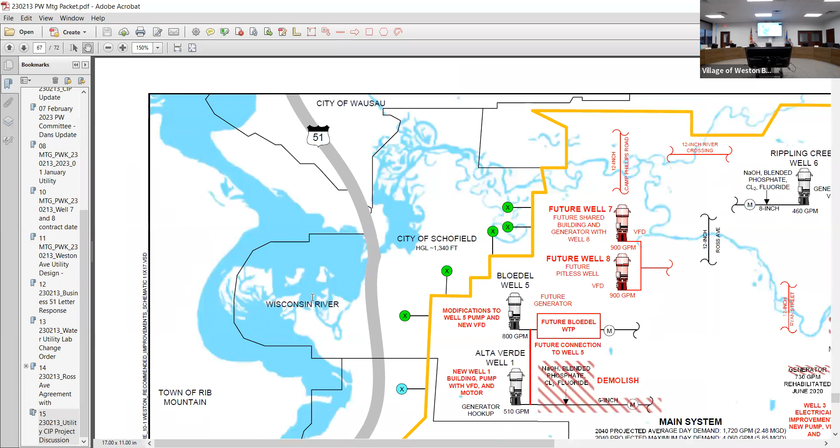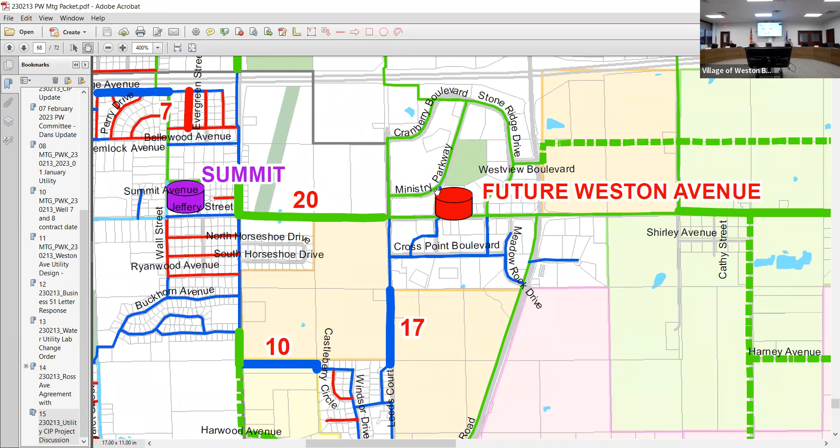Right, the Summit, that is in Rothschild, right? Correct, yep. So probably should just use that on the screen. So we'd get rid of this tower and then use a new tower over here. Rothschild would be happy that we no longer have one less Weston tower in Rothschild. I've heard about that a few times.

So then on this project for wells 1 and 5, it would be taking water from Alta Verde, pumping it to Bloedel and then treating it at Bloedel and then putting it back out into the system.

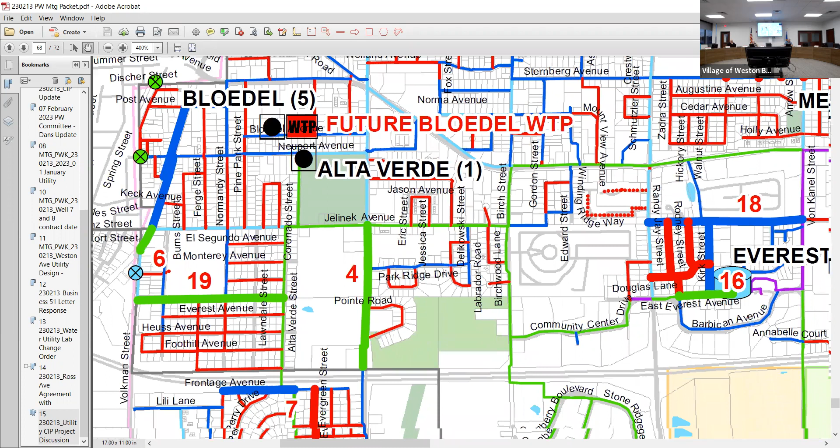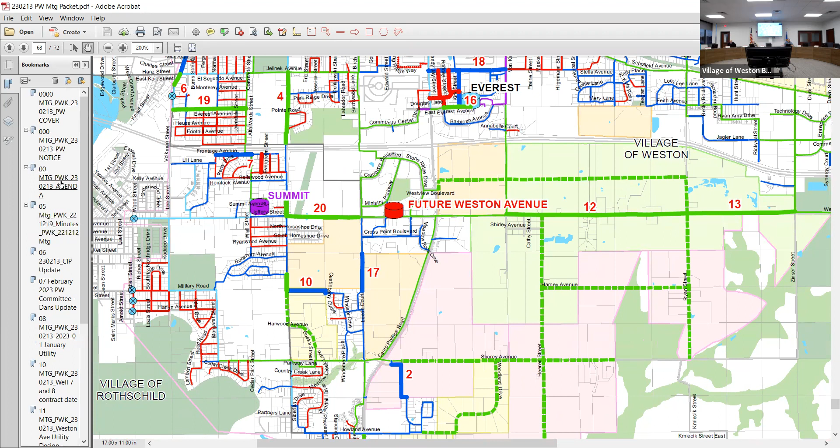Item 16, future meeting dates. Next meeting, Monday, March 13, 2023 at 4:30 p.m., regular meeting. Item B, Monday, April 10, 2023 at 4:30 p.m., regular meeting.

Item 17, topic for future meeting. Do we have anything? The only item I might mention is that somewhere in late March or early April, we'll probably be looking to have a special assessment meeting for the Weston Avenue project. I don't have an exact date on that yet.

Okay, it'll just be an extra meeting, likely not on a Monday night. I have a preference on a day of the week if it's not a Monday. Tuesday? Sure. All right, so I'll try to have a draft. That's one that I could kind of move around with.

Yes, my goal would be to have a draft report likely for the March meeting, then have a hearing probably later in March. So it'd be consistent with the last few projects we've had with water and sewer extensions.

Item 18, remarks from administrator, Mr. Donner. Don't really have anything to share tonight unless anybody has questions on anything. Question for Mr. Donner? No. All right, thank you.